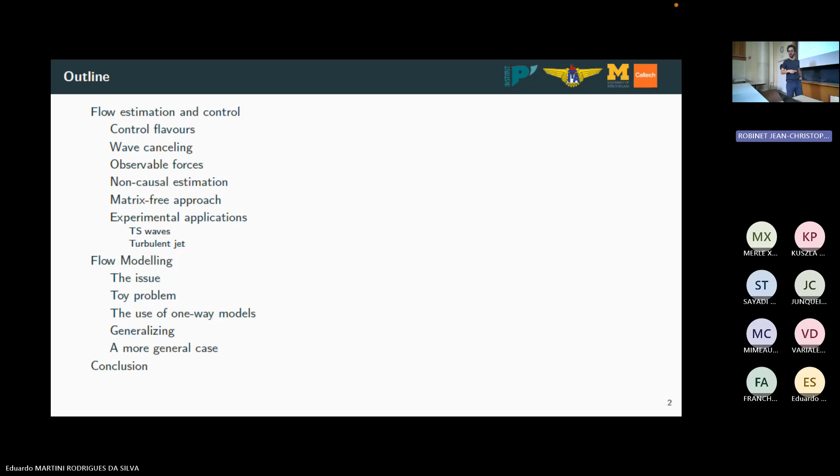A small outline, this is more from my own organization. Much of the slides are about flow estimation and control. We're going to talk about the theory. We are redeveloping optimal control using not the most standard way, and then we have some experimental applications where we need control TS waves and jets, and then the flow modeling approach where we want to essentially break down long-range interactions into something we can interpret physically in a slightly easier way.

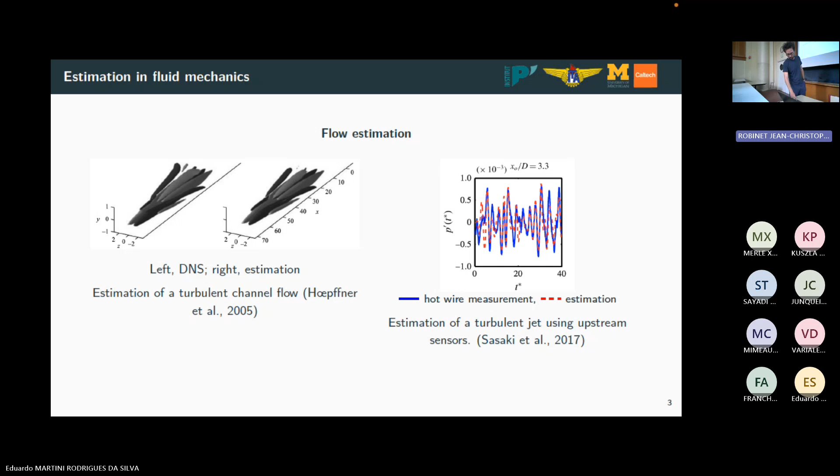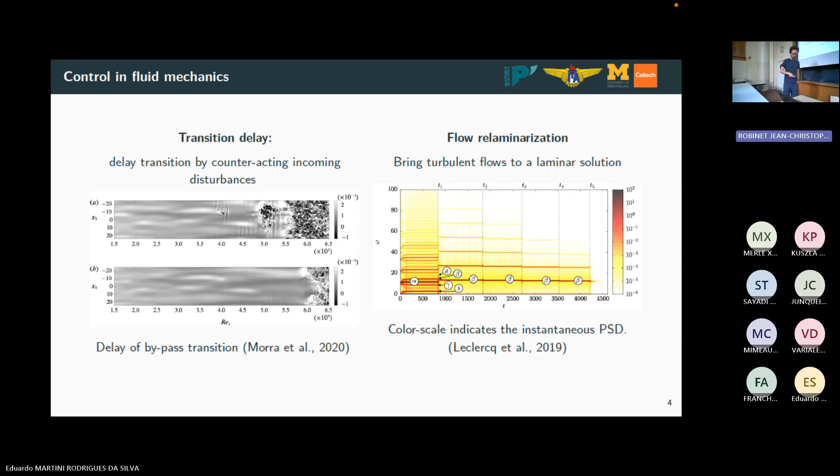Many questions are open, how we can do that in a somewhat automatic way. I mean, here, if I remember correctly, it was a simulation, so you can stop, you can rebuild all your controls, how you do that. So that it's applicable to more general cases. I think it's still an open question, but then anyway.

So when we talk about control, we have to choose what control strategies we want to use, and there's just too many flavors of them. I'm briefly going to mention a few.

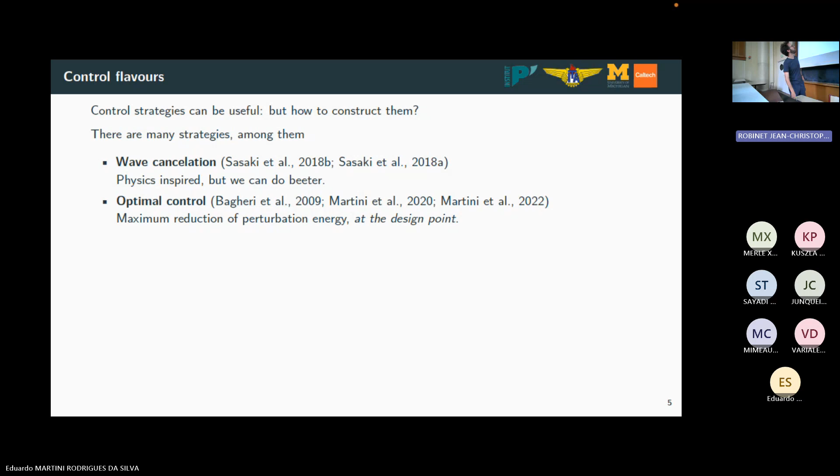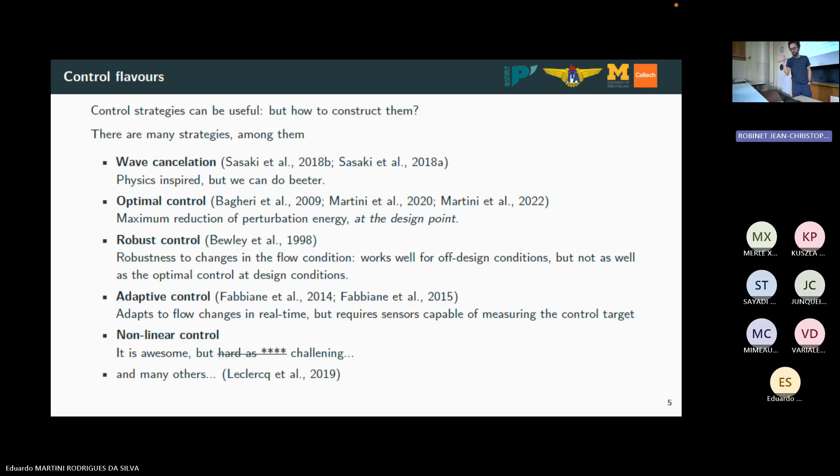And then we have nonlinear control, which is challenging. We're talking about nonlinear systems. As far as I know, there's no unified theory of nonlinear control. If someone should use it, it's tough, and you can pick your flavors. There's probably 100 other strategies for control. For what concerns this talk, we're going to talk about linear control.

So typically what we're going to start from is a nonlinear equation. Here is just a generic representation of the Navier-Stokes equations: this is the Navier-Stokes operator, and we're going to force this with an external force. So F here just means any external perturbation that we have no control of - it could be the incoming turbulence, it could be anything else. A is some sort of actuation, so that's what we're going to put into our equations to modify the flow. And we define a set of sensors: Y here is a sensor, it can measure velocity, pressure, stress, or whatever you want, which is in general a nonlinear function of the state.

And likewise, we have the target, so that's what we want to minimize. The trivial thing we might want to minimize is just the identity operator here, which minimizes the perturbations on the whole flow, but we can be more restricted than that. If you assume that the perturbations are small, we can linearize the whole system and get back to the classical linear framework for the flow. Here F represents the external forces, but as has been tradition for the last 10 or almost 15 years, we can also think of this as modeling all of the nonlinear terms if we are neglecting them. Strictly speaking, if you do that, there should be no nonlinear terms because we are making an infinitesimal perturbation. But often we just do that on the mean flow, which is not a fixed point of the solution, and we just throw all the non-linearities into an unknown term and hope for the best. Basically, that's the approach.

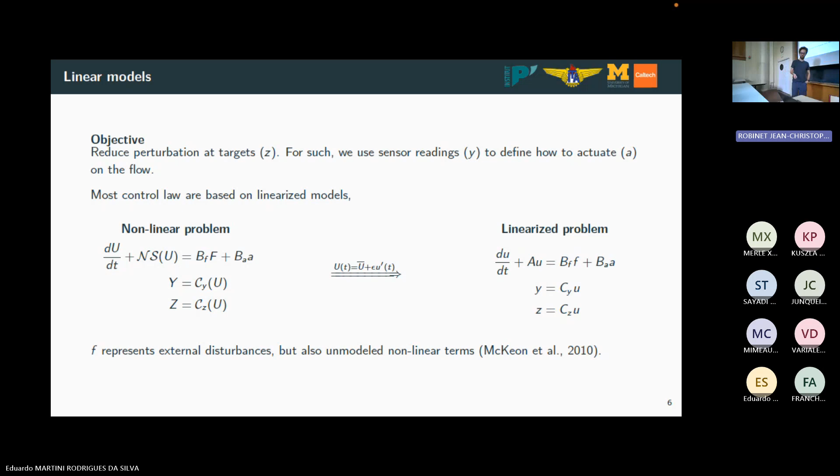The problem with classical control methods is that we have to get your system to be a linear system. To get your optimal control, your optimal estimation, we have to solve an equation of this type, the algebraic Riccati equation.

Any numerical tool has this built in. The problem is that the cost grows very fast, n to the cube. So basically what you need to do to apply classical tools is get a reduced order model for A, with 1,000 degrees of freedom, maybe slightly more.

So that this thing is feasible, it's a strategy called reduce then design. You reduce the model, design the controller on the reduced model, apply it to the full system, and hope for the best. There's more formalism than that, but we're not going to delve into it.

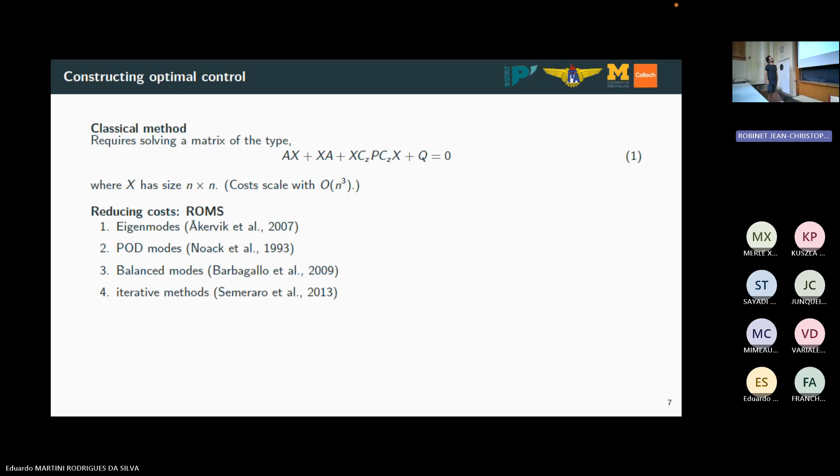To reduce the system, many strategies are based on POD modes, balancing modes. This is not really a reduced order method, but you can kind of get the same results using iterative methods to solve directly for the control gains.

The drawback, which I personally don't like, and some people don't mind that much, is that there are many choices to use reduced order models. Typically, balanced modes are the most robust, but you have to do that, so often constructing the reduced order model is as expensive or more expensive than doing the control in the first place.

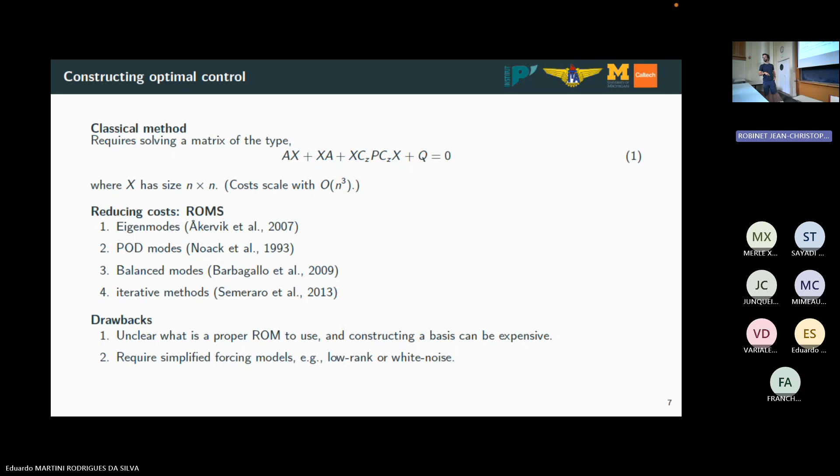Most of the methods that use the classical control framework assume that the external perturbation, the F I showed before, is modeled as white noise, sometimes with spatial correlations. It is possible to put time correlations in that, but I've never seen anyone doing that, because the whole thing just gets into trouble.

So I just want to talk a bit about the wave cancellation strategy, just because it kind of gives the basis of the control method I'll present next, at least in a pictorial form.

So the idea is that you have some sort of perturbation. Here I just changed the notation, I don't know why. Some sort of wave is created by external perturbation D, in flow conditions of perturbation, and this travels downstream. The idea is that we want to build some actuation. We read this wave at this point, and act on it further downstream, hoping that we add to the wave with the red wave, and the resulting wave cancels everything to the right.

It's as simple as that, and this simple picture is basically what Sasaki used in 2018 to do some control, because the whole point was that we can model all of these waves using parabolized stability equations to track single waves traveling through the domain in a very inexpensive way.

So you could estimate this wave, you could get what transfer function an actuation halfway through would give to the flow, and build the controller based on that.

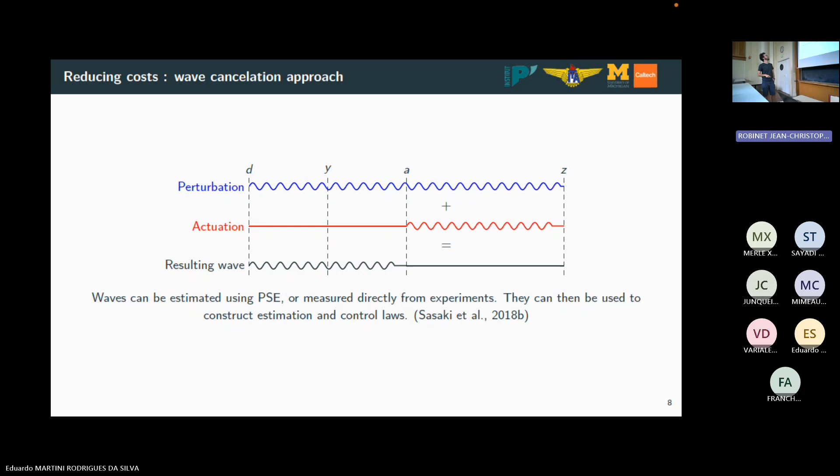So that's his setup. He has a perturbation upstream, a sensor. Here he uses a different method. That's the actuation and the target. All of these transfer functions he computed using PSE.

So he did the whole thing in a notebook. It's very inexpensive. From there he could get the transfer function between the actuation and the target, how everything he was reading in the sensor was related to the target.

And the underlying assumption is that everything that happens at Z is a linear combination. Here I'm in frequency domain, but roughly the idea is that everything that happens there, we can write as a linear combination of everything passing through our sensor, plus a linear combination of our actuation there.

If that's the case... sorry, I just messed up. So here should be D. Everything that happens in Z is a linear combination of the perturbation and my actuation. And here it's completely screwed up, it should be this equation.

We're going to estimate what's going there. Since I don't have access to D, whatever is incoming, I'm going to do my best to say that everything in Z can be written as a linear combination of what I'm reading and how I'm acting on the flow.

I'm going to make a restriction that all my actuations should be a linear function in terms of my readings. The only information I have on the flow is what I'm reading in the flow. Then I can rewrite everything happening there as a linear combination of what I'm reading and my actuation, which I can write in terms of what I read.

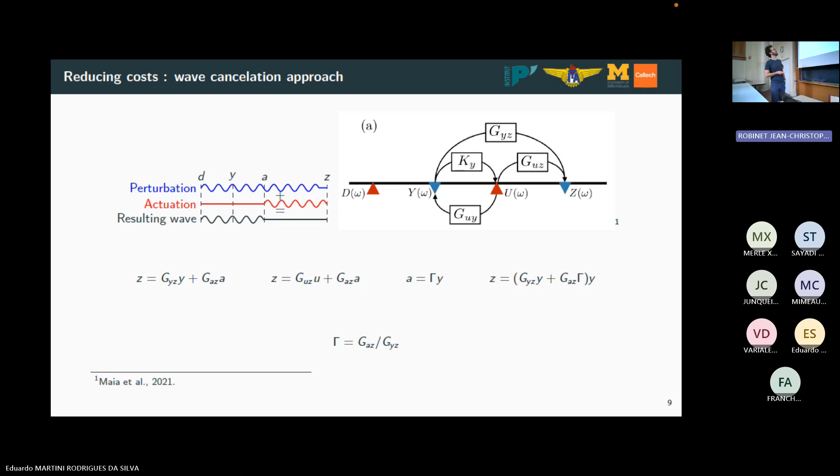So if I choose this gamma here, with a minus sign, as just the ratio of those two, I can basically cancel everything in the parentheses. Hopefully what I get is 0, which is never exactly the case because this doesn't model the whole problem. But it's this simple reasoning that led to the wave cancellation approach. And those are basically the results.

So the framework used to do that was a mixing layer. We have a shear layer here, I'm plotting vorticity. At some point we get the Kelvin-Helmholtz instability triggered, we have vortex formation, there's vortex pairing downstream.

We started by estimating a position downstream. I forgot to write down what the position was, but if I remember correctly, it's around x equals 300. There's a small transient here, but after a while, the estimation and the DNS line up on top of each other. Based on that, he designed the control, again just using a linear estimation. That's what he got on the right.

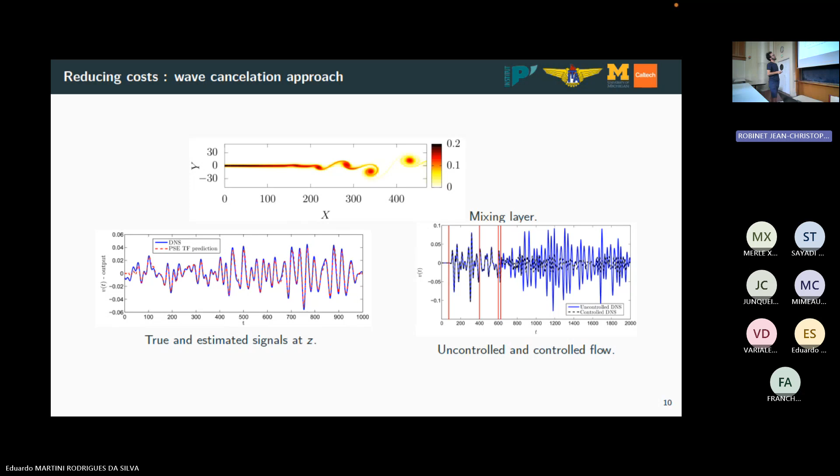So again, there's a bunch of transients there. The whole point is that the blue line was the uncontrolled simulation using the same perturbation, the same initial conditions. For the controlled flow, he gets this black line. So we got a reduction of roughly two-thirds of the perturbations at our target. So that was quite interesting.

Open questions after he did his work: what are the perturbations we can control? So that's a somewhat simpler case. It's a mixing layer. We know that everything is going to become Kelvin-Helmholtz after a while, at least in this regime. In a more general case, if we have many waves, how do we track that? Can we do better? This was just based on the feedforward approach.

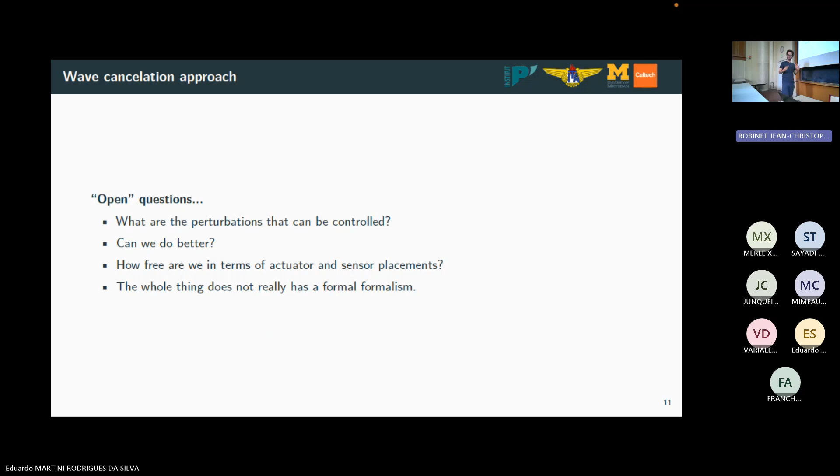How free are we in terms of actuators and sensors? We just chose something. This is a convective system, so we know waves are going from left to right. So in his approach, you need to have the sensors on the left of the actuator. Is that an absolute necessity? Can we do things better? From his approach, it's not clear. And it would be nice to have a formal formalism to add some robustness, to add some formalization to the process.

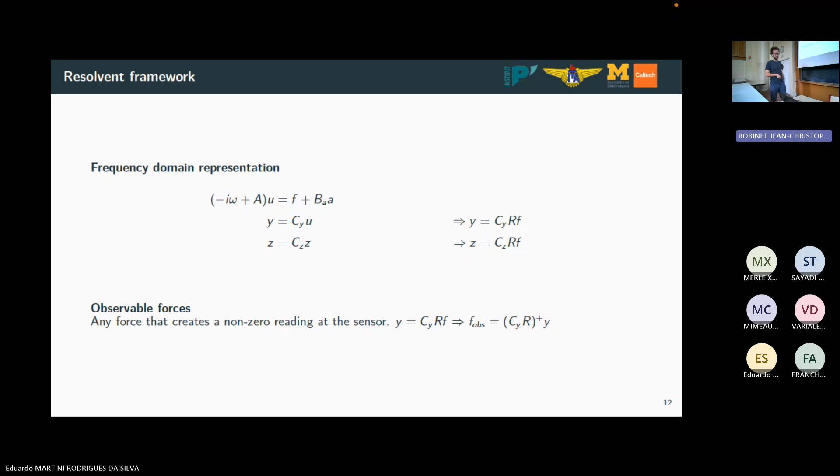And we studied that, our first study was on a boundary layer. So here, it's just a boundary layer, at Reynolds 1000 based on the initial displacement thickness.

All the green circles were sensors I used, those were just control positions. The diamonds here were sensors I used, and we try to understand what forces each sensor constructs.

So starting from here, let's see from the previous slide, the observable force is just the adjoint applied to the sensor. So we just did that. We applied the adjoint resolvent force by this guy. We got a mode like that.

Everyone recognizes that as a Tollmien-Schlichting or Orr-Sommerfeld mechanism wave, meaning that the forces that create readings here have this type. So this is the type of external perturbation I can measure, or at least I can only measure stuff that has a non-zero projection at this point.

If you do the same thing for the other point, we have a similar wave from here all the way to the left. What you find out is that it gives more information if you make the orthogonal basis on that, so pretty much remove everything that was here. So we can interpret this as all the extra forces we can capture with this sensor that we could not capture with the previous sensor.

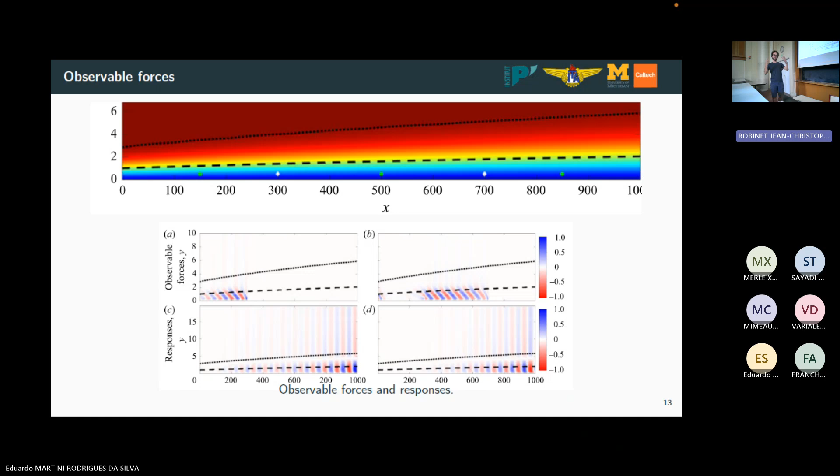So whatever I do in terms of optimal control, we can only do that because anything else cannot be controlled for. I just threw that in the air, and it took me a year or so to formalize.

Those things are, for many of you who are probably well versed in control theory, this has direct relation to controllability modes, of course. We're not doing anything new.

Personally, I like this kind of interpretation because I did this for one particular frequency. You can do that for all the frequencies. The controllability modes are a weighted linear combination of the responses on all the frequencies.

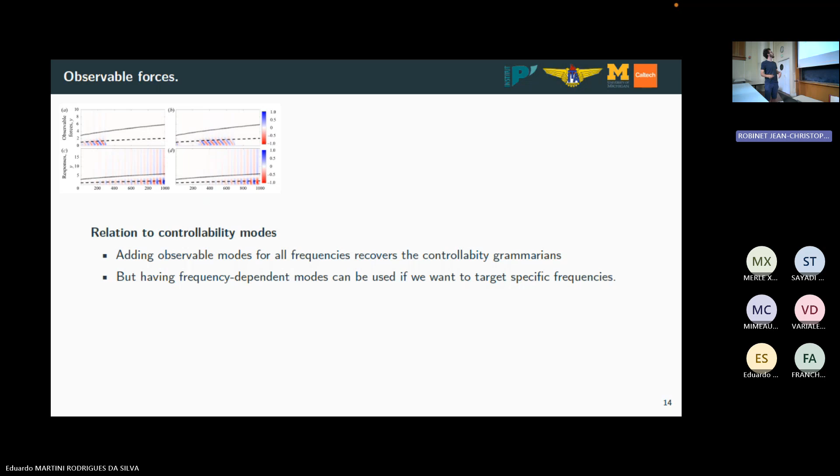But I find the controllability modes less interpretable. This in the frequency domain is easier to understand what the physical mechanisms are for each frequency, particularly if you want to tackle one specific frequency, there's a resonance, there's something else. We can look directly at what are the observable forces, what are the responses, and try to understand what's going on.

So then the question was how we formalize this thing for estimation and control. This is basically redoing linear control here. We start with non-causal control, meaning non-causal estimation, we estimate everything a posteriori. That was our first approach to the problem.

So the goal is to have a flow U. We want to find a U tilde that minimizes it. It's the same kind of Lagrangian you want to minimize in a standard Kalman filter. We put the restriction that U tilde needs to be a linear combination of our sensors.

We also consider that we have some sort of sensor noise, and we consider that all the external perturbations have correlations, right? So this is a generic forcing CSD, the correlation of the external disturbances. We can solve this directly in the frequency domain, which gives us an expression for this T_U, the matrix equation that gives the optimal transfer function between sensors and estimated flow.

Some features of that is that it only depends on the resolvent operator, so we need to be able to compute that. We're going to talk about that soon, but there are ways we can do that quite nicely.

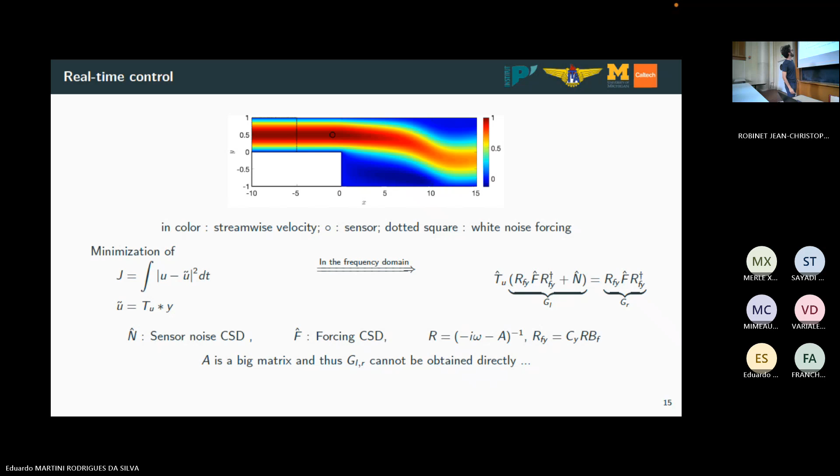So here's an example we did on this type of estimation. We explored this in a follow-up study. Up to now, we were talking about a paper I did in 2020, developing the optimal estimation using this frequency domain approach. Here, Amaral did a follow-up study, seeing okay, what that really represents on the flow, how good or bad we can do that.

And I could highlight here on the role of using proper forcing CSD. So this is a channel flow. We are estimating the streamwise component using only shear sensors on the wall. On the top panel here, we have 3 different positions: Y plus at 15, 100, and 200, so moving away from the wall.

On the bottom, we have an estimation using F equals I. That means you assume that the whole thing is just white noise and not adding any physical information on the flow. If you're close enough to the wall where the sensors are, this is pretty good. As soon as you move away, we have a complete crash of estimation.

Not estimating everything. But if you put F - and here we cheated a bit, of course - we computed the nonlinear terms directly from the numerical simulation, from the DNS, and we computed all the statistics of the nonlinear terms, and we used those terms to construct F. But I don't have any real-time information on the nonlinear terms, only the statistics. If I use that in my estimation, well, now what I get is this.

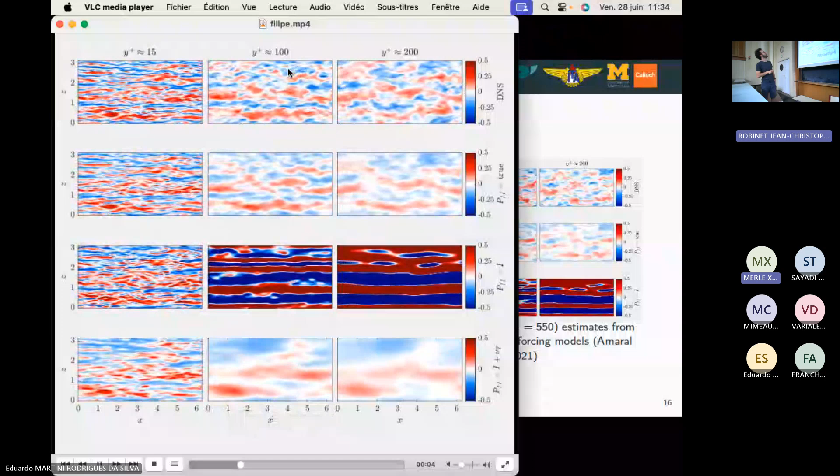Here we have one extra piece of information where instead of doing that, we're using an eddy viscosity model. We don't have to dwell on when or when not to use viscosity models for linear systems, but just to say that this here is the improvement on top of a white noise approach where we don't assume anything, but we can do better. This is quite close to the DNS results.

So that points us to the direction that we have an estimation framework that is nice. We got something new, which was an easy way to incorporate all of the turbulent statistics if we have them. I don't show this here, but we developed some methods to retain a low-rank estimation of that based on a few sensors, in case you don't have a full DNS to work with. So we can approximate that without having to do the full numerical simulation prior to estimation.

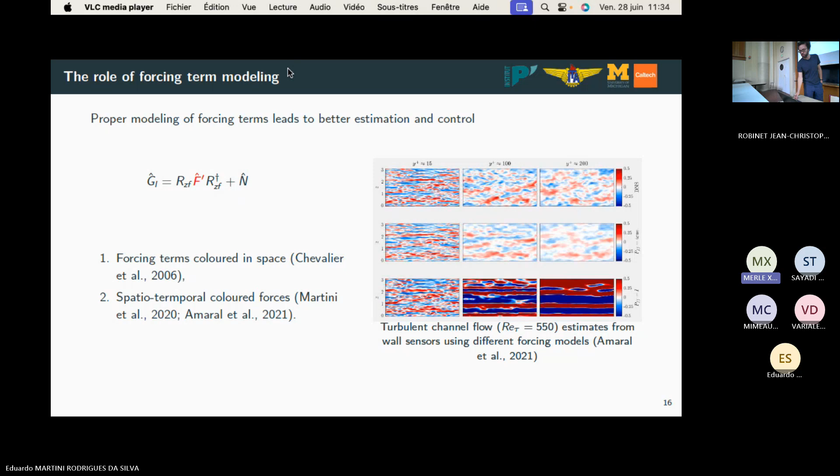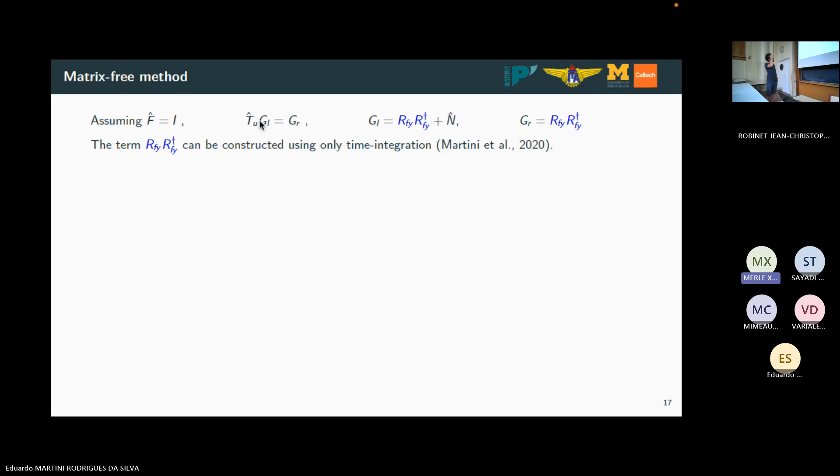Okay, now we get to the point of how we do that for large systems, because so far we did that on a channel flow. So we get Fourier in time, Fourier in alpha, in x, Fourier in z. We end up with a matrix of 100 degrees of freedom, or the whole resolvent, adjoints, pseudo inverse is straightforward to do. The question is, can we push that to more complex flows?

And that's what gets us to time integration methods. So what we need to compute the whole control is to construct those terms. Here, for simplification, I'm assuming F equals I. The only thing I need is the resolvent operator, and here is a shorthand notation for the resolvent between a force in F and the output Y.

So we need to add the B matrix on the right and the C matrix on the left, and its adjoint. So what you see is that the only thing we really need is the composition of those two terms in my equation. And how we do that for large systems.

So the goal is to start the system with an adjoint run. We just solve the adjoint system, forcing the system at my sensor with a delta in time. In practice, we use initial conditions to emulate that, but that's details. The point is that if you Fourier transform the solution of that, what you get in the frequency domain is directly R dagger Cy. So we basically already have this term.

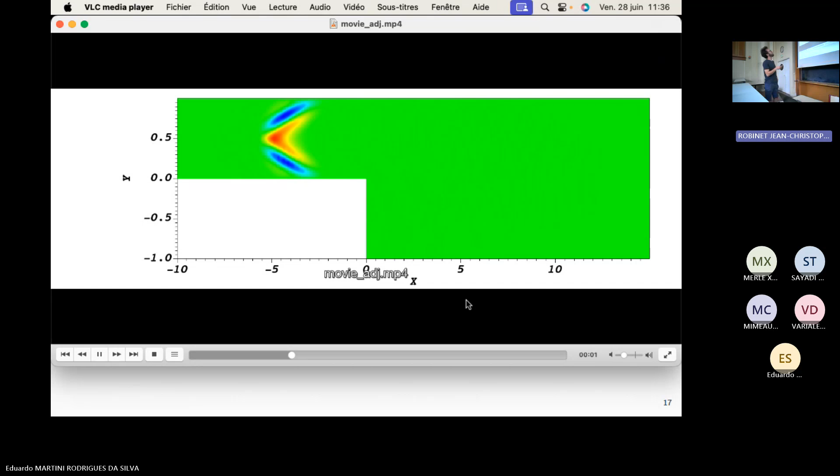And again, just to show what this looks like, this is for one sensor located here. We just have the sensitivity of the mode that moves to the left, that gives us a time domain representation of all of the observable forces we have in this flow.

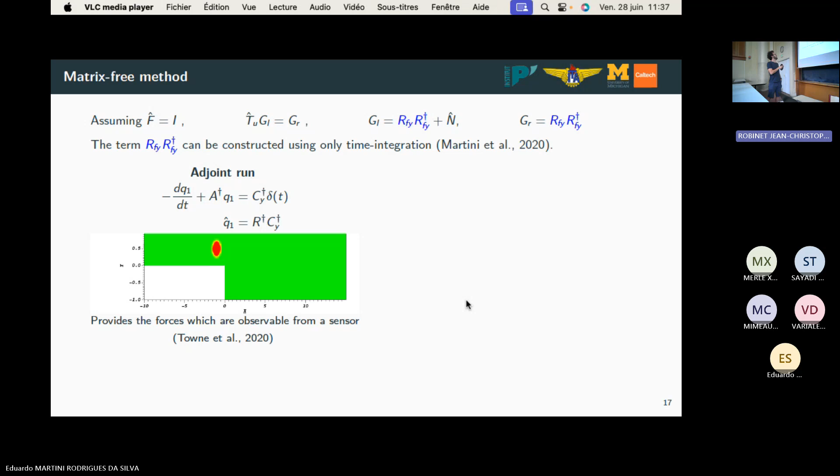I forgot to mention this, we call this in English march descendant, backward facing step, which of course have all the sensitivities on the left.

But we need the product of this guy by its adjoint. So what we do is that we use the solution of this equation to force a direct equation.

And again, if you transform this thing to the frequency domain, what you get is the solution of the field is R. We have the BF, which is going to filter out all the sensitivities to the place where we actually have external disturbances, or where we're modeling the external disturbances are. And from here, we can construct this product.

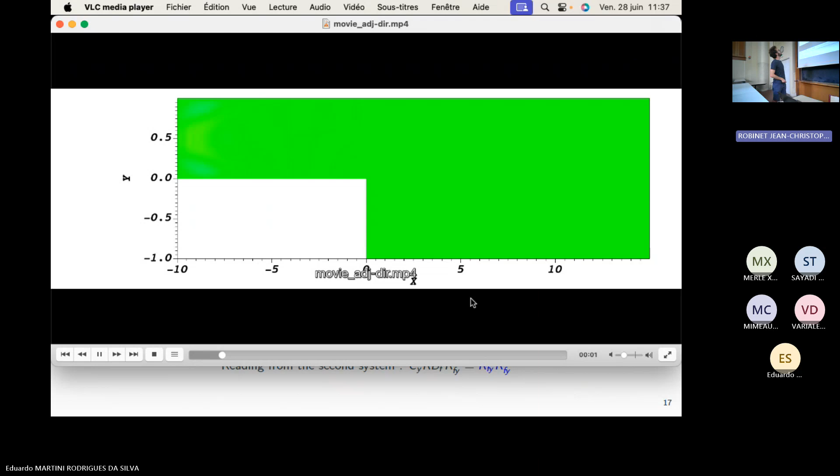So on the left, we have a time domain representation of the observable forces. This would be a representation of the controllable perturbations. That is, it's just the response of the forces we have on the left, the backward facing step flow.

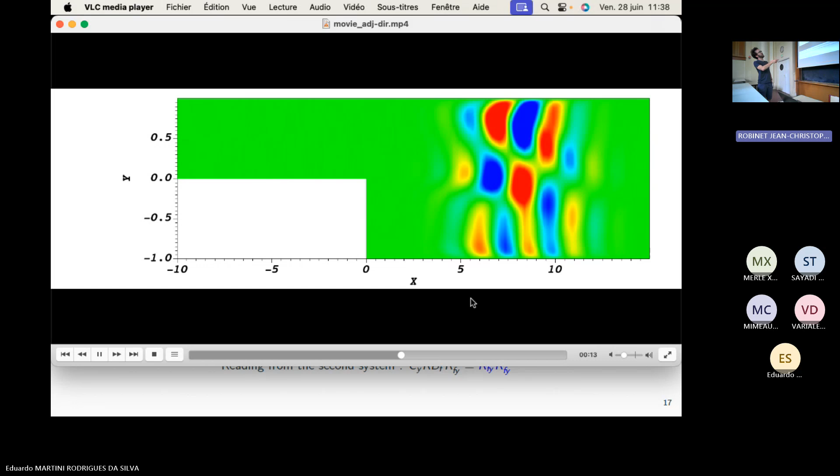So here we have a shear layer. We have Kelvin-Helmholtz like waves which get amplified downstream.

So the nice thing is that we have to do that for each sensor. In this case, what I'm going to do, I have 3 sensors, I have to repeat this procedure for 3 sensors. But after that, I have all the information I need to construct any sort of estimation and distributed optimal control.

So it's fairly inexpensive. In my opinion, it's about the same cost we need with time steppers to construct some sort of reduced order model. But you already got all the information to control.

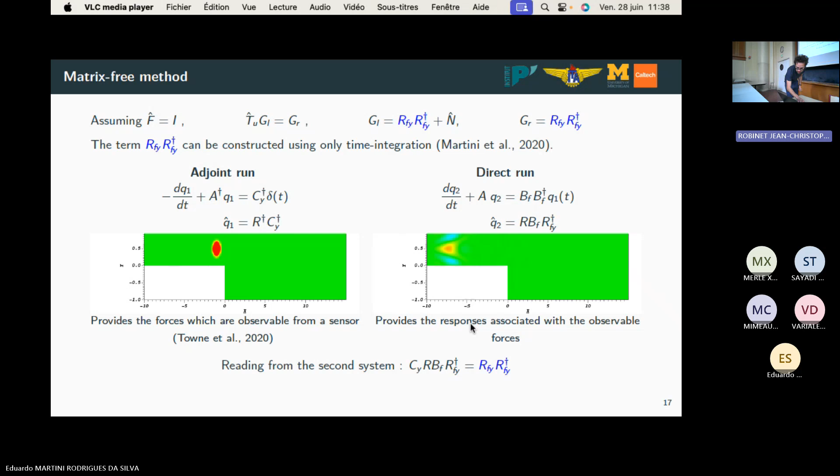The question is now, with that approach, we could redo everything we did for the channel. But the point is now I want to move forward and use that for real-time applications.

And the goal here is just to add a constraint in my equation using Lagrange multipliers to enforce causality. So I want to optimize this with the constraints that all my transfer functions are 0 for negative times.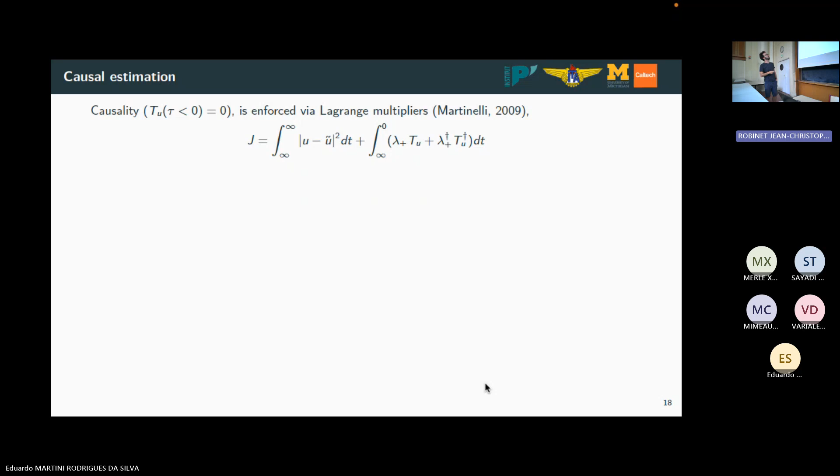I'm going over time already. You have okay time, I'll try not to spend too much time.

So basically, I get the same equation I had before in the frequency domain with this guy. This is a classical Wiener-Hopf problem. I'm not going to talk about the details. We found a very nice method to do that.

We can only work with that analytically if you have 1 degree of freedom. If you want to use multiple sensors, it's messy because Wiener-Hopf problems don't have analytical solutions. But we find a numerical method that works quite well. We do that on a notebook, so it's not expensive at all, with multiple sensors, multiple actuators.

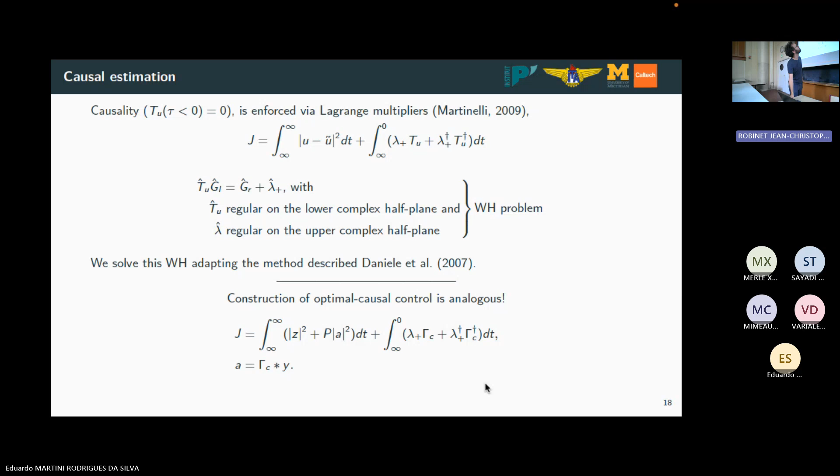And the extension of this estimation, causal estimation, to a causal control, it's quite straightforward. We just minimize the perturbations. We add here a penalization on the actuation, so that's the actuation penalization term. The formalism to enforce causality is the same. We get a slightly different equation, but the underlying idea is the same.

And then we wanted to compare what the causal control kernel, that is what we can use in real time, and with a non-causal control, which is not applicable at all, but it's the optimal. It's a nice benchmark of what we could do if you knew the future, right?

And then we're going to truncate this non-causal control to its causal part. Just what I'm going to show now is quite abrupt. That's essentially what we did for the wave canceling approach.

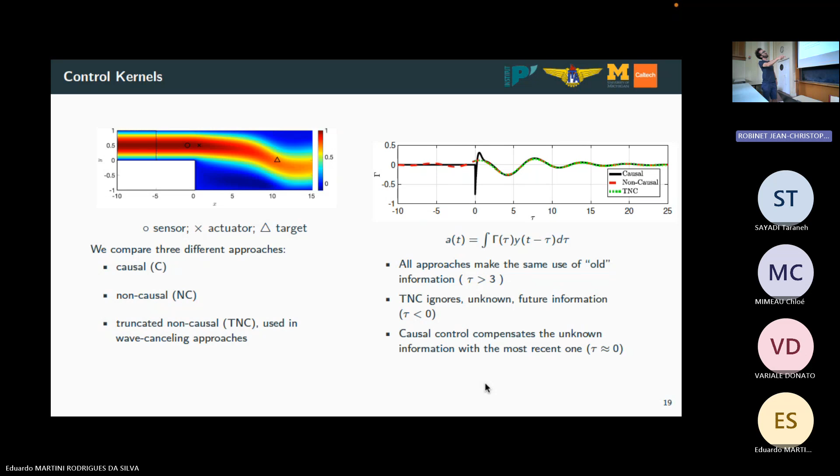But any realistic application cannot do that. If the actuator is way downstream of the sensor, then all of the controls are the same: causal, non-causal, truncated non-causal. They all give basically the same response. Which would mean that everything in this kernel is to the right there. So there's no negative part, there's nothing to be compensated. That's quite a trivial case. That's exactly what Sasaki did in his study, without knowing that at the time.

But what you see is that if you just truncate the non-causal control, as soon as the actuator moves to the left of my sensor, we have a drastic loss of performance. If you impose causality a priori, we can actually have an actuator that is way more upstream than my sensor, and we're still quite effective in terms of control. So that already shows us that imposing causality a priori gives us much more freedom in the choice of sensors and actuators. There is a robustness question, which I'm ignoring for now, but doing that has this advantage.

Another advantage not shown here is that, remember, before, to estimate what is happening there, I only needed to do an adjoint run on my sensor, followed by a direct one. So to do this control for any of those actuators, all I had to do was have my estimation, which needs 2 linearized runs, and get a transfer function from an actuator to my target, which I can obtain using an adjoint run from my target backwards in time. All of that to say, all of these parametric studies we did using 3 linearized runs and post-processing. The potential of that to do actuator parametric analysis is, I think, just fascinating.

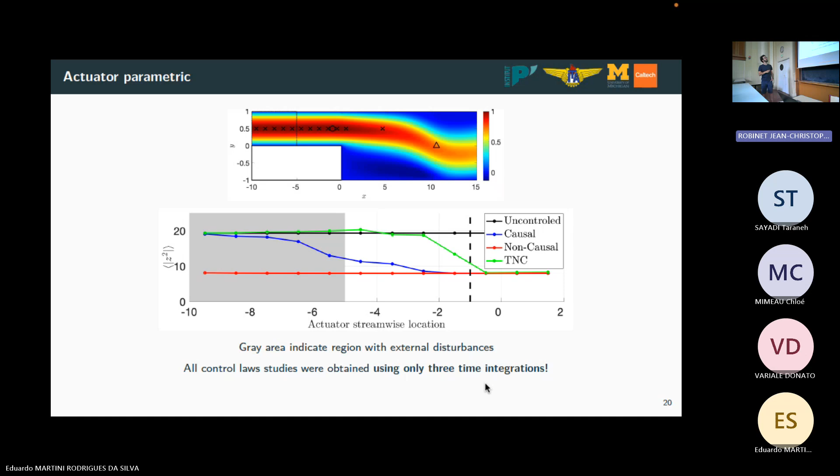We have a whole classification of problems if we restrict the external perturbations to a lower rank approximation. We have just 1 or 2 sources of perturbations. We can do a full parametric study of sensors and actuators of the problem: number, position, shapes, everything, only post-processing data of a few direct and adjoint runs, which I think is great for at least a first exploration of the problem, where we place sensors, what we need to do.

What that shows is that if you do the naive approach of just truncating your kernel, it works quite well if you have 1 sensor. If you have multiple sensors, things start to deteriorate, even if the actuator is downstream. The rest is basically the same story: we have more robustness, we keep the control performance even if we are upstream.

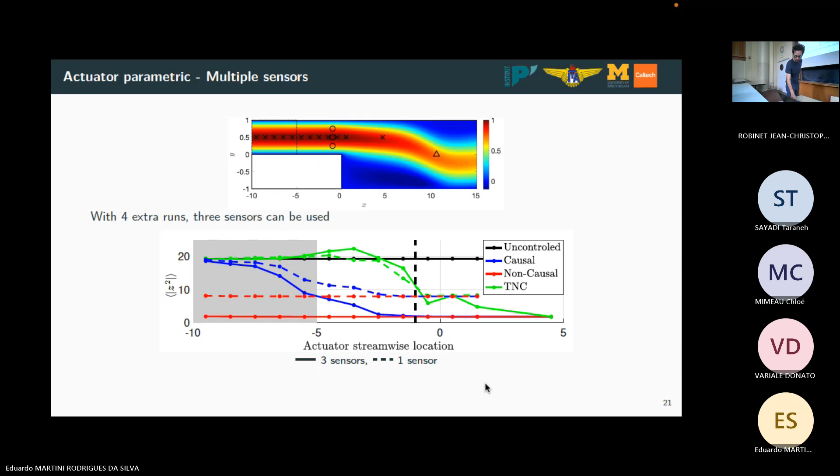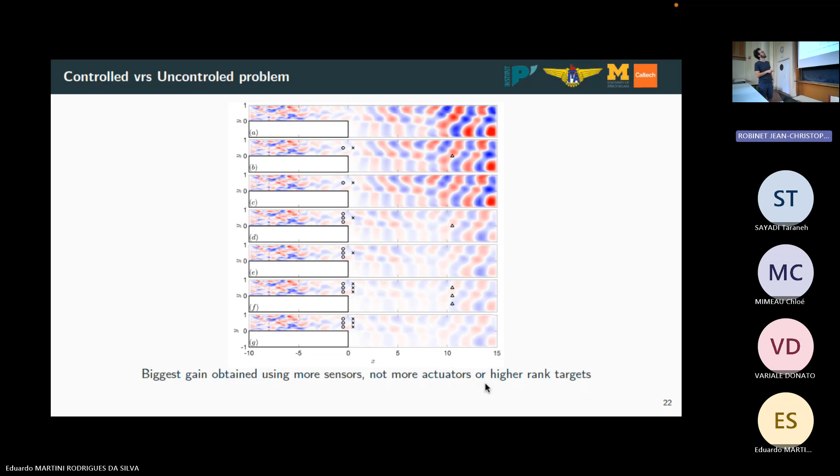And then just to illustrate, all the control results were obtained using just a few adjoints, and we can estimate the flow using causal approaches. When I don't have the triangle, I'm minimizing the energy of the whole field. I have 3 sensors that changes quite significantly the control performance. If I add more actuators, I control more. It's a whole parametric study we did at the time. And I'm going to jump quickly here.

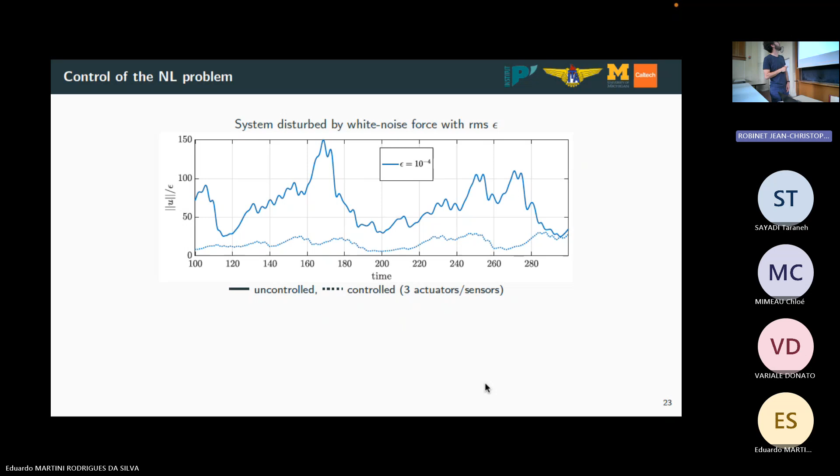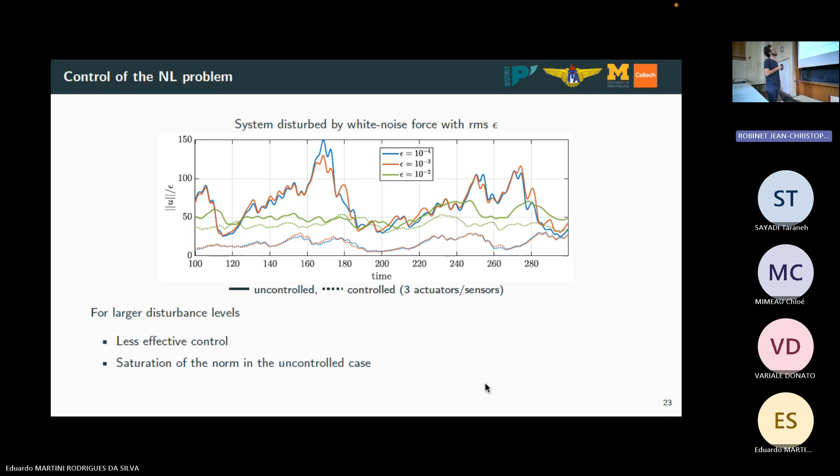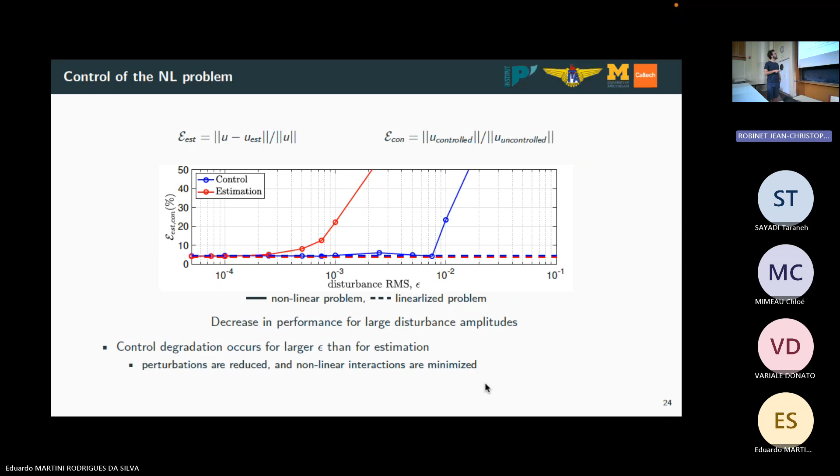We did the same thing now for the nonlinear case. So we start with a very small external perturbation. Solid lines is the uncontrolled flow, dashed lines is the controlled one. You can see that up to a perturbation amplitude of 10 to the minus 3, we pretty much get the linear regime; at some point this deteriorates, which is expected as the flow gets nonlinear. What is interesting is that if you compare estimation and control performances, the estimation performance degrades way faster than the control performance, which at first sight was a bit surprising because you wouldn't think you could control what you cannot estimate. What figured out was obvious afterwards: only the non-linearities became important after my sensors. So when I had the shear layer, the Kelvin-Helmholtz instability was developing, so what the control was doing was preventing the nonlinear terms from becoming important. That pushed this performance a bit upstream.

And now we get some experimental results. Everything we did so far was on numerical environments. What we did here is, okay, let's try to use this approach for real.

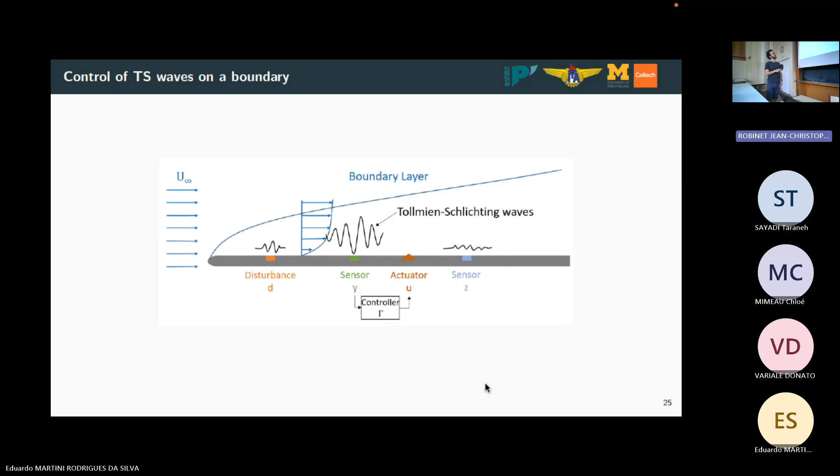So the first attempt we did was control of a Tollmien-Schlichting wave. The configuration is the same as we had before. We had some disturbance which was imposed on the layer. We want to measure that using a sensor, use an actuator to cancel this thing, to minimize whatever we have on the target. My figure just screwed up, forget about this.

What we have here is the PSD of the uncontrolled flow. For a baseline, what we did - we were using plasma actuators, so we had to turn on the plasma, a steady plasma, because by itself we had a reduction of the perturbations since it was changing a bit the base flow. And then we could compare the performance of the truncated non-causal approach and of the Wiener-Hopf approach, which is causal by construction. What you see is that the gain is not huge, but we already have some gain, even though the setup was originally designed specifically for the wave cancellation approach.

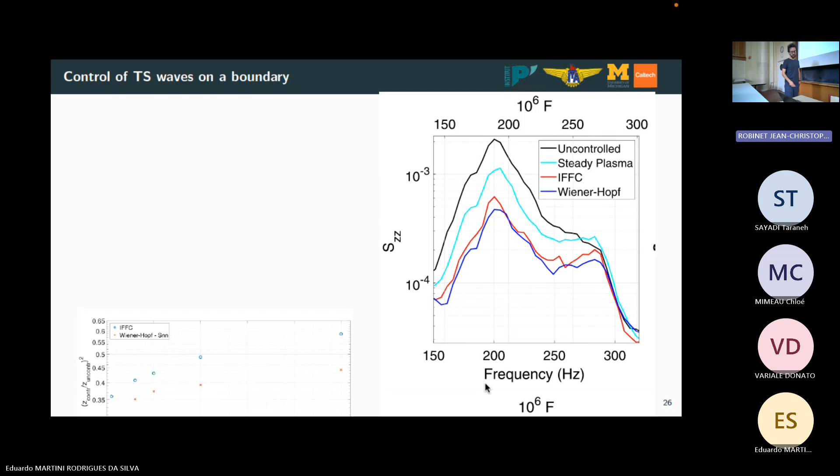What we did later was a more challenging case: we went to a fully turbulent jet. This is an experiment we did in Poitiers. I forgot to add the reference here - it was Maia that did that in his 2022 paper.

He did two things. Initially he did the same thing as we had for the boundary layer. We had some loudspeakers here which create excitations on the nozzle lip - axisymmetric excitations, because we're only interested in axisymmetric modes in this experiment. So we want to reinforce that to make it easier, to be honest. We measured these axisymmetric modes using an array of 6 microphones, and we're using 6 loudspeakers connected to a small tube that's creating a synthetic jet close to the shear layer, slightly downstream. The goal was to control perturbations further downstream, which we were measuring using a hot wire.

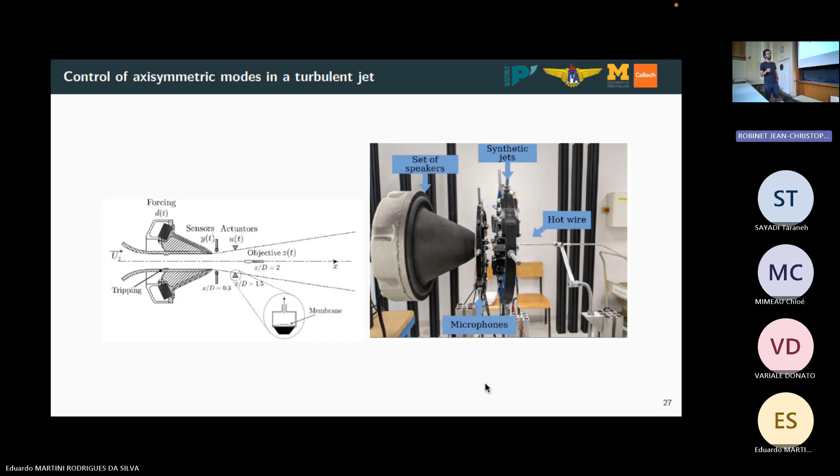We did that using this external perturbation, but afterwards we removed that and did the control of the naturally turbulent jet. This was an easier target, but what we found out is that we can also control the naturally turbulent jet, so that's the only one I'm showing here. We have the uncontrolled flow, which is in black here. It's important to say that we chose a specific frequency range to control - we're not controlling everything. It was between 0.4 and 0.9, if I remember correctly.

We compare a steady actuation, just blowing the actuators steadily, to be sure that any gain we have is not an artifact of just changing the base flow. If you do that, you have this huge peak, which gives us confidence that we're not biasing our results favorably.

Then you compare the non-causal control, the truncated non-causal control, to the causal control by design, and you have a nice reduction, we got like 40 or 50% of the turbulent energy out of the hot wire, reduced using a linear control on a fully turbulent jet. We managed to show this is not even an artifact of the point where we do control. We later moved our hot wire along the x-axis, the jet axis, and we have perturbations that consistently reduce it downstream, all the way up to 7 diameters downstream of the jet.

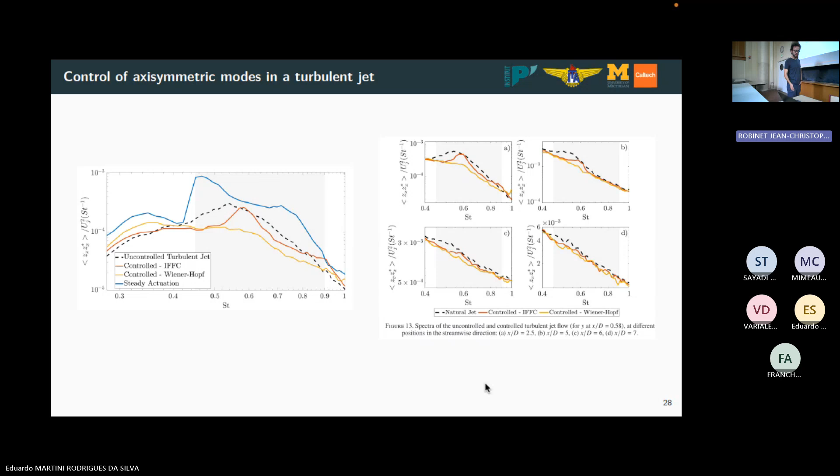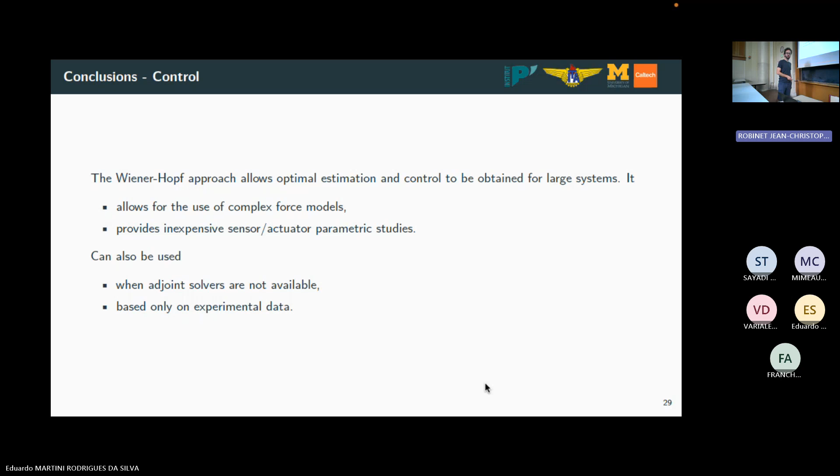So we really managed to change the dynamics of the turbulent jet using a linear control and a bunch of microphones. I'll quickly skip the conclusions: we have a nice method that can be used for complex flows, we don't have to reduce the model. We have straightforward implementation on experimental data, while numerical tools that do that are fairly expensive, other than the linearized and adjoint system.

So I'm gonna go quickly here. That's my toy model I'm working on right now. The question is about flow modeling. When modeling flows using a linear system, we either use eigenmodes, so we're talking about eigenanalysis, and you look for the modes that create either the vortex shedding, the von Karman vortex shedding, or here I'm just showing an eigenmode of a screeching jet. We do linear analysis, we get eigenvalues of the matrix A, and we look at the frequencies.

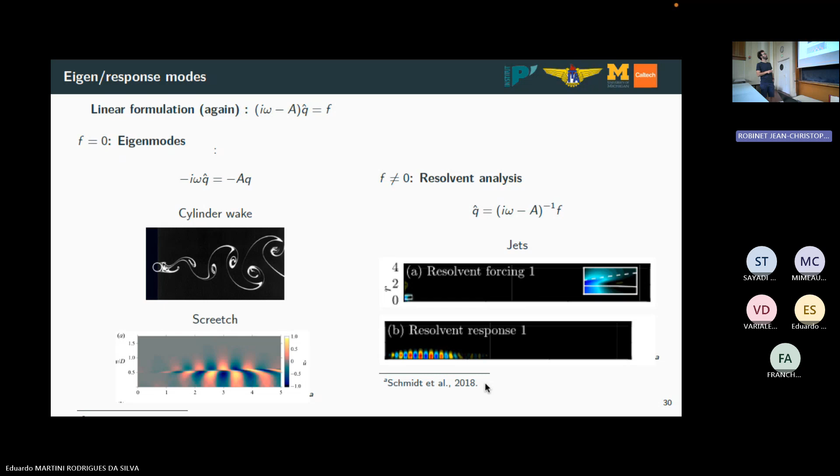Or people do the resolvent analysis, where I assume that there is external forcing. We look for the forcing that optimally forces the flow, and we get a response. This is all nice. I'm going to focus on those two cases because I think they illustrate the point that bothers me.

For this case, when the resonances are local like that, it's not that complicated, but it's something that demands a study. We have to delve into the physics to get this.

For screeching jets, it's slightly different. We can do the same thing, we can compute an eigenmode, we got an eigenmode like that. I'm showing shortly after the spectrum, and the question is, how can I make sense of that? For me, it looks like a Kelvin-Helmholtz wave, right? The problem is that Kelvin-Helmholtz is typically a convective instability, and for a screeching jet, we have global instability. The whole thing is just resonating and being noisy.

So either we have some sort of absolute instability, which no one found yet, or there is some sort of long-range mechanism. This Kelvin-Helmholtz wave travels downstream, gets reflected at some point, moves upstream, is reflected by the nozzle, creating a resonance mechanism. But how do we identify that? Many people created models for that.

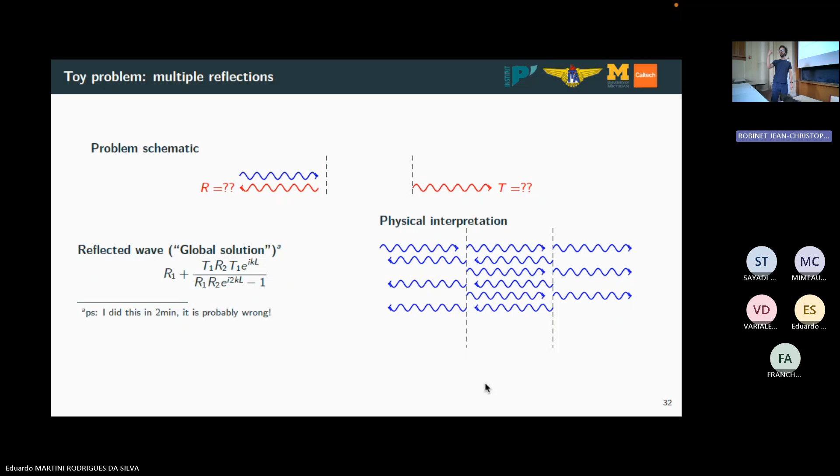So this is all nice, but the problem is that for this simple problem it's easy to do - I have one wave going to the left, one wave going to the right. How do I generalize that?

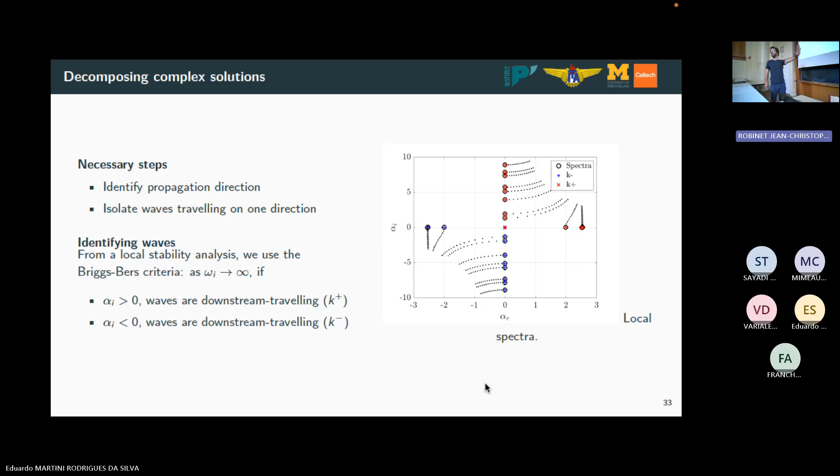I'm marking them with red and blue markers to identify K plus and K minus. So what I want is to get all of the K pluses in one solution, and get the secondary reflection using all of the K minus, and iterate that.

To isolate those waves, Towne in 2015, doing his thesis and follow-up works, developed what's called a projection operator that basically filters out all of these negative waves, K minus waves, or upstream propagating waves, to get me only the other ones. We can do that by brute force, or he has an iterative method to do that - that's beyond this point. There's a numerical method that projects any solution only onto the plus subspace, and he uses that to get an approximate solution for a linearized system using only its K plus parts.

So he did that for a jet, for instance, and he gets a solution that looks like that. Anyone who has done the resolvent analysis on a supersonic jet knows that's basically how things look. He compares this to different solutions, and it's pretty accurate, because on the jet there is no K minus wave. So by ignoring them, he stabilizes the problem, and he can spatially march this thing downstream.

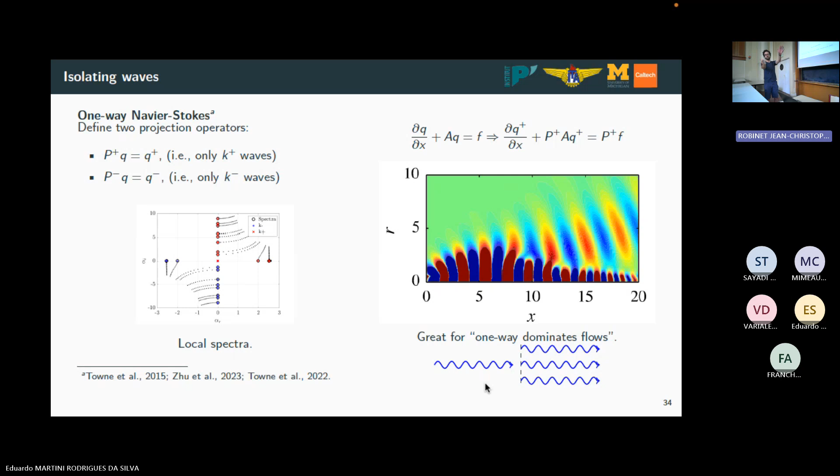My toy picture, or model picture, for this flow is something like that. I have one wave that gets put on this thing. This wave gets scattered by the divergence of the flow into other waves, but all of these waves are moving to the right, so you don't have to care about the left-moving waves.

But now I want to get both waves. So how do I do that? There's a paper that was published this year. What I want to do is called a Bremmer series. Basically the idea is that in my equation, which I'm marching in x, I decompose it by adding p plus and p minus in front of every q, where q is just my state space.

The idea is that if p plus and p minus expand the whole subspace, which is what I had before, I only had minus or plus waves. This is exactly the same equation as before. I can rearrange it into a k plus part and a k minus part.

The idea is then I set k minus to 0, and march only my k plus part. I cannot solve the full equation because I'm ignoring part of it, so there's always some residual. But then I can later come back, integrate the k minus with my previous k plus, which gives me some reflected waves. It's not going to exactly solve the equation, but I can keep iterating, updating my right going waves and my left going waves to try to get a solution.

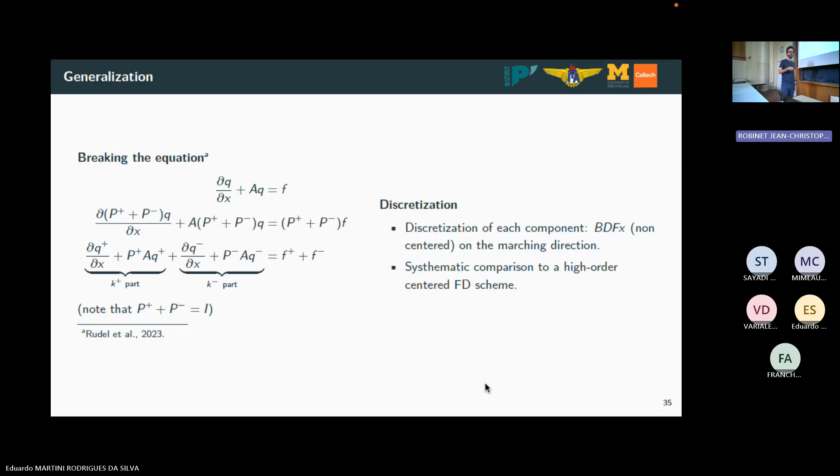What I do is discretize those two terms using a backward differentiation scheme: upwinding to the left here, downwinding here because I'm marching in the other direction, such that those two methods are stable in the direction in which I'm marching. Just to be sure I'm not screwing this up, I compare the solution to one obtained using a centered finite difference scheme, to check it's not that I made a mistake and the solution isn't valid.

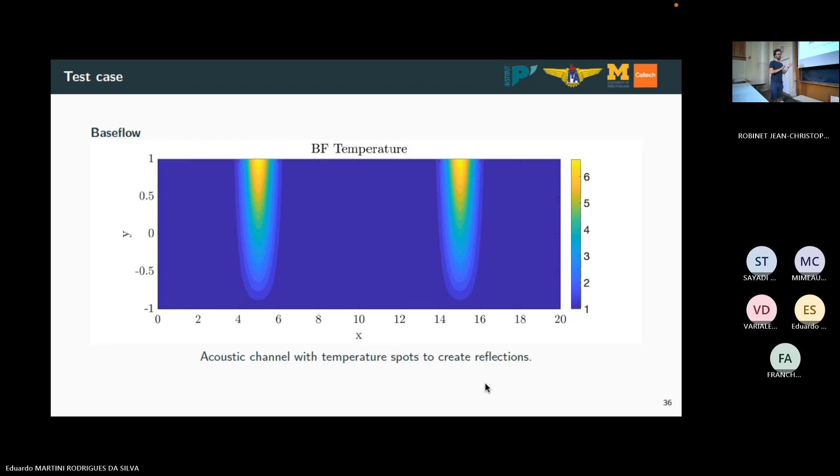So that's my problem. I had a classical channel flow, an acoustic channel. As reflection points, I just added 2 hotspots, and on purpose they are not symmetric, so as not to bias my solution. If there are reflected waves, I don't know a priori what they're going to be.

If I do that, here's what I have. I start - this is my first k plus marching. I initialize my flow on the left with a plane wave. This wave is traveling downstream, and it reaches the reflection point here. We see that the wave pattern gets more complex because my temperature profile is not uniform.

So here we have second and third harmonics that start to play a role in the flow. It hits the second reflection point and gets further complexified, but all those waves are traveling to the right.

I then compute all the residuals of my equations, assuming this is my solution. I use those residuals to get my k minus wave. The color scale is a bit misleading, but basically we have zero throughout here, which is kind of expected. But at the first reflection point, we start to see the formation of upstream traveling waves, which are further amplified when we reach this position, which was my first reflection point.

So again, we have first reflection, second reflection. Those two reflections are building up my waves as they travel to the left. I get those two waves, which are now my guess for the solution. I compute the residual and repeat.

So here we have the same thing. Now I get secondary reflections at this point and secondary reflections at this point, which forms a new set of k plus waves. Here again I have tertiary reflections, and it keeps going forward. At some point the figures start to resemble each other because we just have resonance between these two reflection points. But if you look at the amplitudes, we go from 10 to the minus 3 to 10 to the minus 4, so the series is convergent in a way.

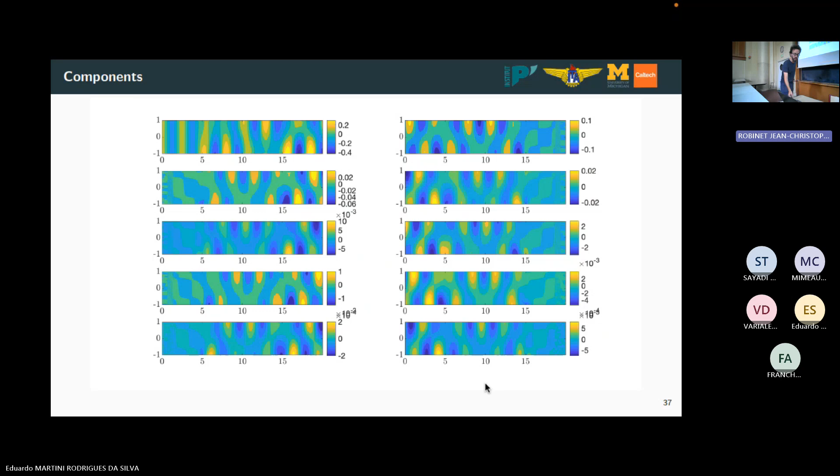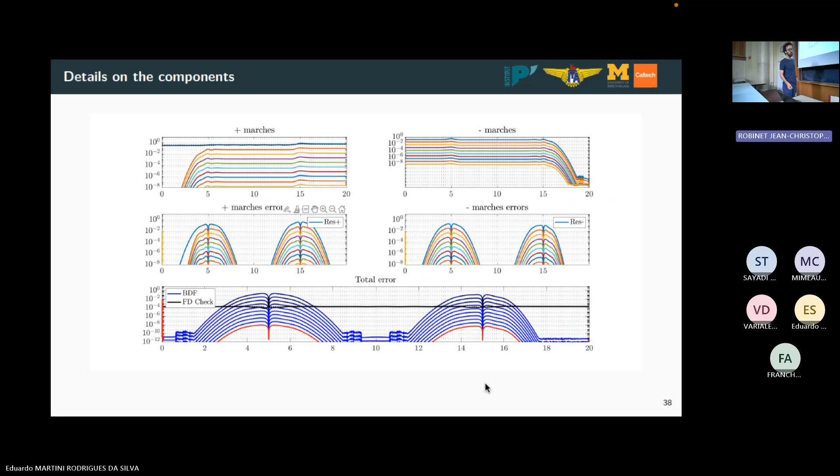What gives me confidence that this works is that if I do a finite difference scheme, in the first iteration you have some background residual. At some point it follows the residual I'm using in my spatial marching. That tells me these waves have important reflections that my marching scheme is missing, so it realizes something is missing in the solution. As I keep iterating, this missing part goes down. At some point I have a background residual because it's not the same numerical scheme, so it's natural that they won't both be zero. So that makes me pretty confident.

If you summarize this plot, now doing a more parametric analysis, all the solid lines are the residuals of my backward space, my BDF integration scheme. All the dashed lines are marked control using a centered finite difference scheme. I forgot to mention, but for the control I'm always using a higher order scheme just to be sure it's closer to the truth.

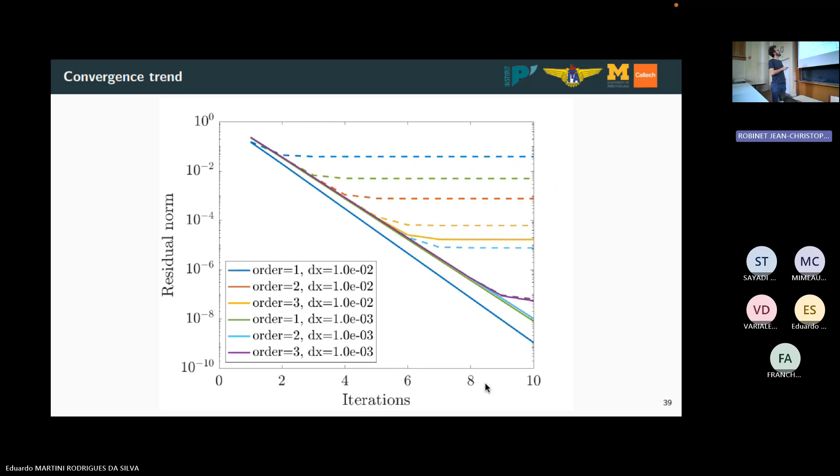What I'm doing is increasing the order of my marching and also changing the spatial step. If I start with order 1, that's my residual when I compare it to the finite difference. If I increase my order, I get smaller residuals, even smaller residuals, which points toward the fact that this thing is convergent, and likewise if I reduce my dx, the solutions are always convergent.

So that's all fine. The missing part for me before going to complex flows was that in many flows we have saddle points. The question is what to do with a saddle point, because a saddle point is when a k plus and a k minus wave meet, and then I don't know if this thing is plus or minus - it's both at the same time. How do we handle that? That's where I spent most of the time with this work, trying to figure this out, because if I want to do screeches, it's going to have saddle points all around. There's no way around that.

What apparently works quite well is relaxing the condition that my projection operators need to add to I. I'm just naively splitting my equation in two, where on my plus wave I'm keeping all of the downstream propagating waves and what I call P0, stuff close to the saddle point. I'm keeping this thing also on my K minus wave. So if I go back here, this is my spectra away from the reflection point, and now I'm increasing the temperature difference to force the formation of a saddle.

In the previous solution, there was no saddle - a K plus wave was always a K plus wave. Here, things start to change. My approach is that here I can easily cut this domain, keeping these waves in one solution, those waves in another. Here what I'm doing is that everything in a circle around this point, I'm keeping in both solutions.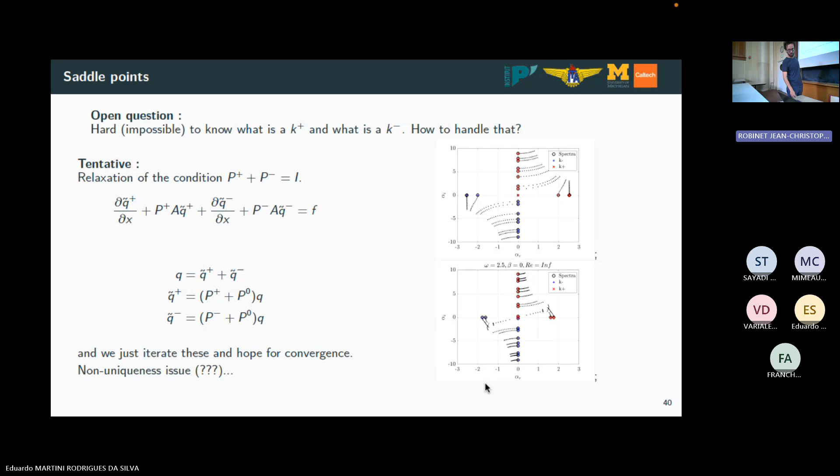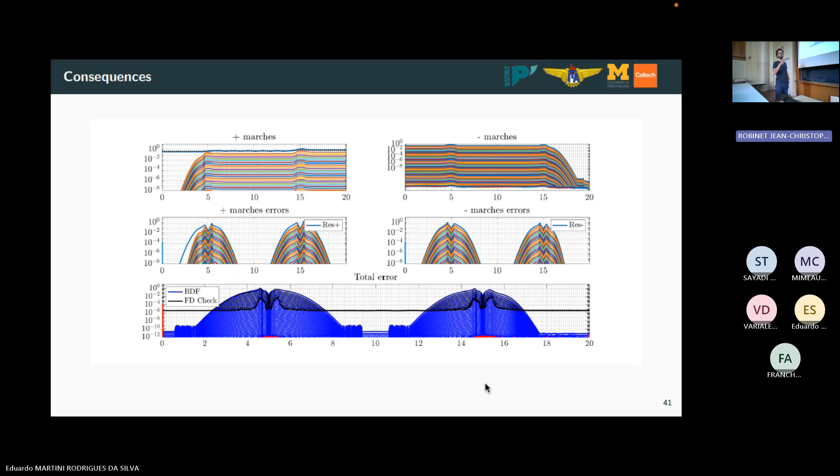But what I did was just to try this out on a flow. It's the same flow, I'm just increasing the temperature difference on the reflection points. Same pictures everywhere. I have way more lines because I did way more iterations to make a point that once you get to the final check here, we don't simply get the background noise, but we have some residual of the reflection points, which I think is somewhat related to this inconsistency between the K plus and the minus.

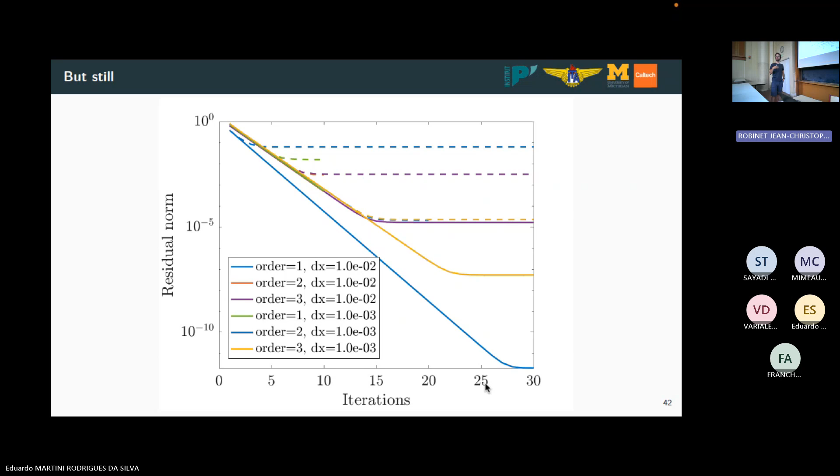But the good thing is that apparently if you increase the order, or the times, or the number of points, those things go to zero. It took me almost a year to get it right. I think now I have something that can confidently march complex problems to figure out the plus and minus waves and get reflection points. The next step now would be to use the approximate projection operators of Towne to be able to approach bigger problems.

This is quite naive - I have 20 points in the radial direction - and use that to really study screech flows and other types of flows.

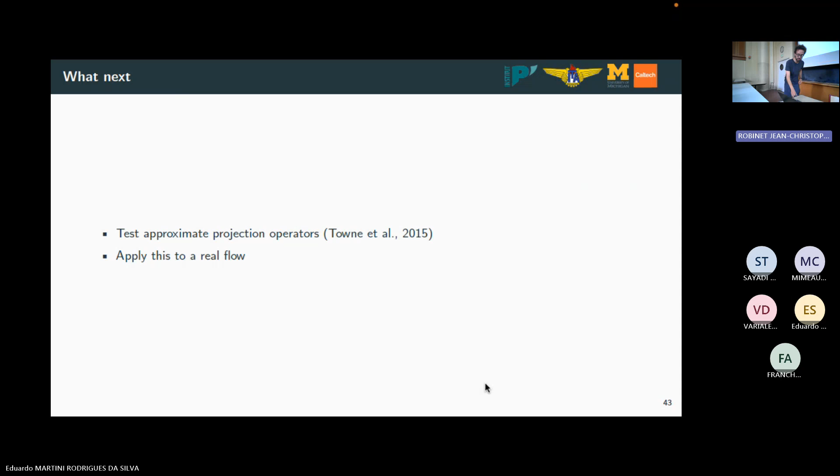So I think I went over time. I'm sorry about that, but that's pretty much it. It's okay.